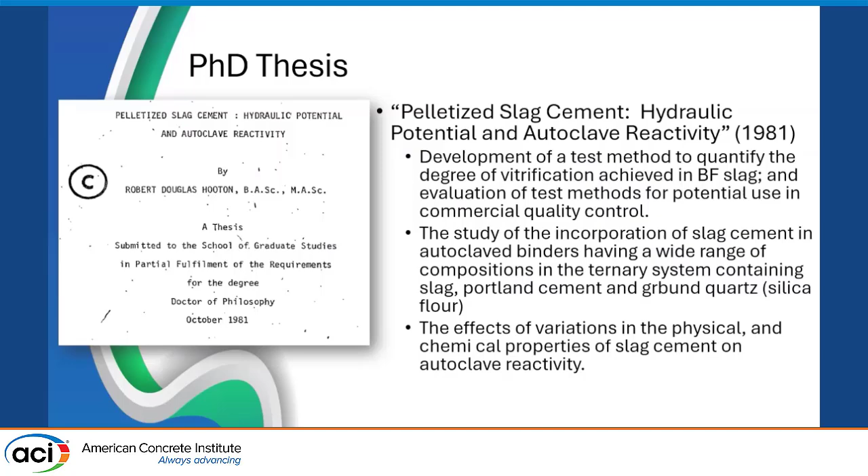The study also studied the incorporation of slag cement in autoclave binders having a wide range of compositions in the ternary system containing slag, Portland cement, and ground quartz or silica flour. And then finally, the effects of variations in the physical and chemical properties of slag cement on autoclave reactivity. So that was the 256 pages. There were several technical papers that resulted from this, of course.

The scope of Doug's research over the many years includes concrete durability and service life, various properties of Portland, SCMs, all SCMs, not just slag, admixtures, structures and bridges, and especially durability, waste material utilization, alkali aggregate reactions, sulfate resistance, de-icer salt scaling resistance, properties of ancient concrete materials. I think some of those were the original buildings built with slag in Toronto. Those are now ancient. And performance standards, specifications for concrete.

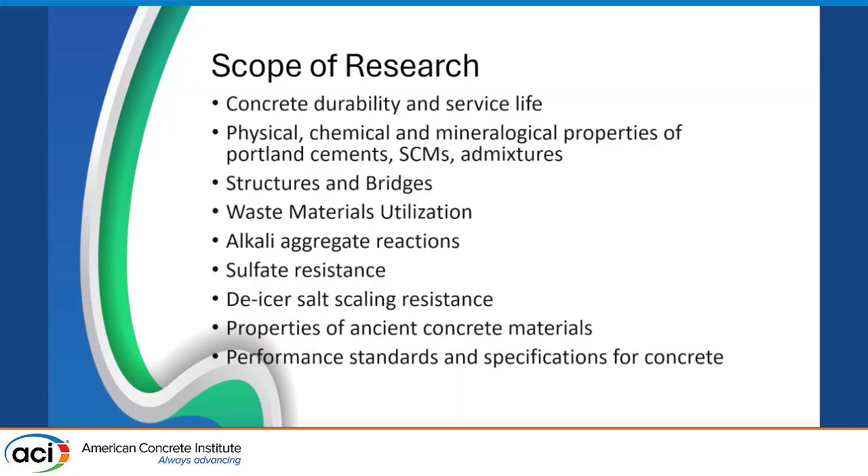He's received many honors. Some of the highlights are the Bryant Mather Award from ASTM. He's an honorary member of RILEM and ACI, and he was awarded the Research Chair in Concrete Durability and Sustainability from the Natural Sciences and Engineering Research Council of Canada and the Cement Association of Canada, just to mention very few of those awards.

Now let's get into the meat of my presentation and talk a little bit about Doug's work with slag cement. Doug has a curriculum vitae on his website, so I went through that, and I did a quick look and found out that probably around 42 out of the 226 items in his scholarly and creative works had to do with slag one way or another.

His very first cited work was glass content determination and strength development predictions for vitrified blast furnace slag. This, I believe, was probably an offshoot of his thesis. It was part of ACI SP 79 in 1983, and in this he established that XRD was the most reliable method for determination of degree of vitrification, and it also established that the strength of slag and Portland cement mortars was related to the chemical composition, fineness, and degree of vitrification.

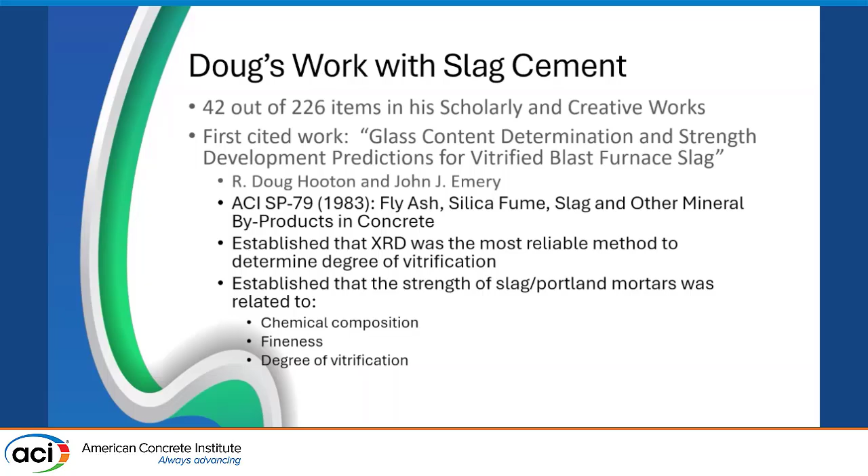So what I thought, because there's so many different works that Doug has done, I went back to, he is chair right now of ACI 233, and I was trying to look for some history. Do you know when 233 was formed as a committee? Were you on it when it was formed? 83, 84. Yeah, you probably were one of the original members on it. And if nothing else, you're a very long-standing member of the committee.

And I looked at that, and there are 16 references in that report, which is our current report for ACI 233. And what I thought I'd do is, since those were the ones that were cited, is take a quick look at each of those and see the different areas that Doug had a hand in, and there are many.

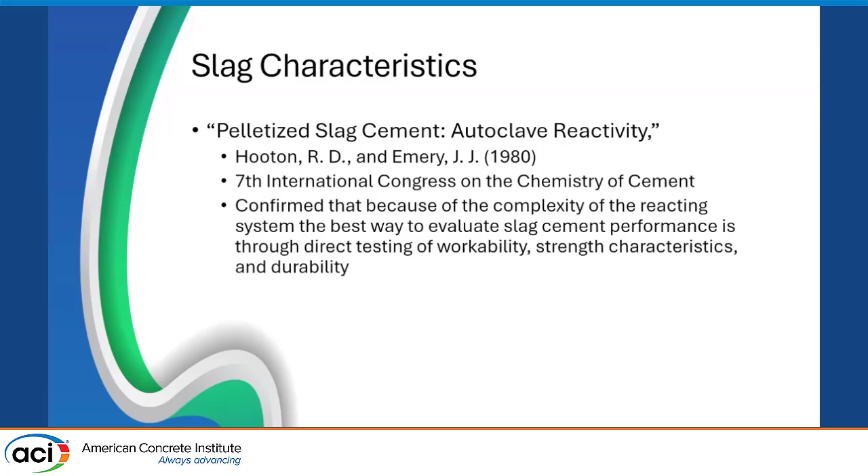For instance, on slag characteristics, there was a paper called Pelletized Slag Cement Autoclave Reactivity, and it confirmed that because of the complexity of the reacting system, the best way to evaluate slag cement is not necessarily by looking at the materials that it's composed of and whatnot, but really through direct testing of workability, strength characteristics, and durability.

Then we get into some of the durability aspects of slag cement. For instance, sulfate resistance. Doug had a paper called Sulfate Resistance of a Canadian Slag Cement. This is one of the references in ACI 233. And it was published in the ACI Materials Journal.

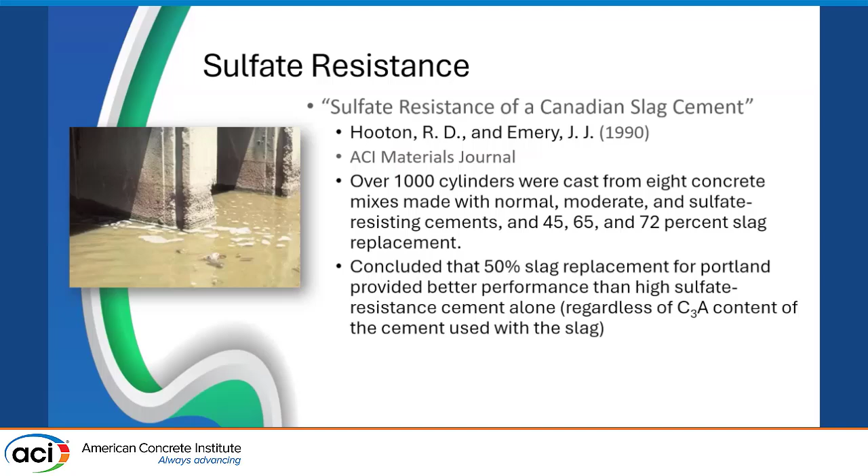Here they did over 1,000 cylinders cast from 8 concrete mixes, looked at 45, 65, and 72% slag, and basically concluded that 50% slag replacement for Portland generally can provide a better performance than a high sulfate resistant cement, regardless of C3A content. So you could use a type 1 cement with 50% slag and get better performance.

Also, Doug's done a lot of work with ternary mixtures of various types, ternary with slag and silica fume, slag and fly ash. Generally, most of them are with some type of slag in there.

His paper, Some Characteristics of High-Strength Structural Concrete, summarized one of these ancient concrete structures, the 68-story Scotia Plaza building, and it had a ternary mixture with 28% slag, 7.5% silica fume, and there was some concern that there was some strength retrogression in silica fume concrete, so he did some testing over 7 years to ensure that was not happening.

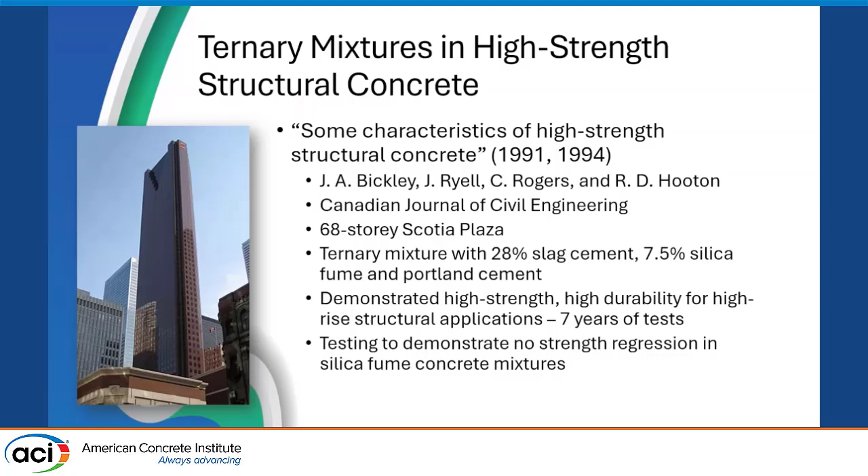Another paper was Canadian Use of Ground Granulated Blast Furnace Slag as an SCM for Enhanced Performance of Concrete. This particular paper kind of summarized a lot of the benefits of slag cement, strength enhancement, workability, durability enhancements, and also noted that slag had become, at that point in time, which was 2000, the predominant SCM in Ontario.

Another paper is Durability of Ternary Blend Concrete with Silica Fume and Blast Furnace Slag. This was a series of laboratory and outdoor exposure site studies which showed how ternary mixtures with slag cement and silica fume significantly improved rapid chloride permeability and ASR resistance. And this used large-scale cast-in-place slabs and simultaneous lab specimens, and actually looked at salt scaling too. And we'll get into salt scaling a little more. Doug's done quite a bit of work on salt scaling.

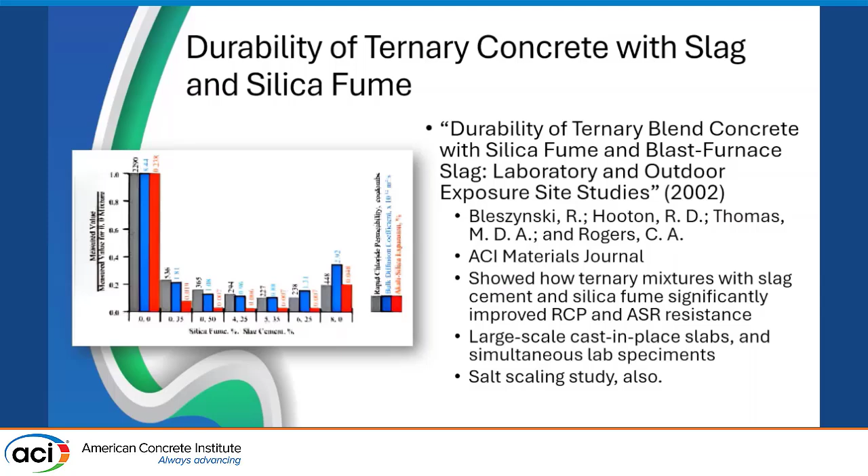Even delayed ettringite formation, there was a paper called The Effect of Pozzolans and Slag on the Expansion of Mortars Cured at Elevated Temperatures, microstructural and microchemical investigations. And basically what Doug showed here was for slag, metakaolin, and fly ash, using the right materials and the right amounts, you could generally prevent DEF from occurring in heat-cured mortars.

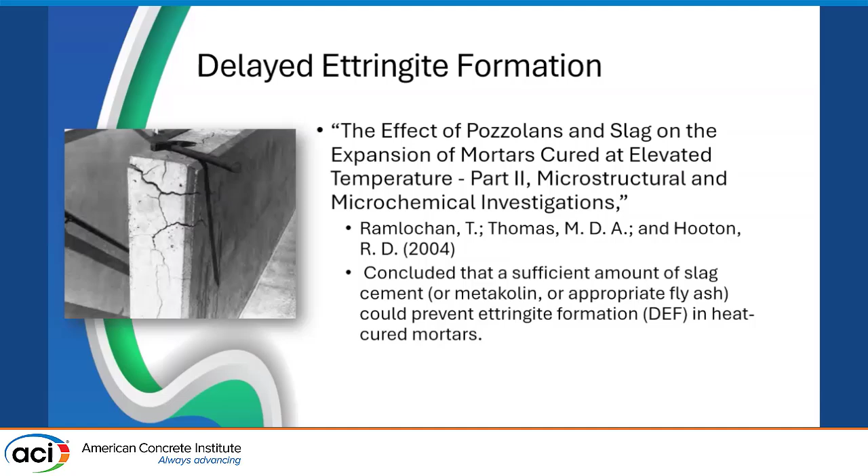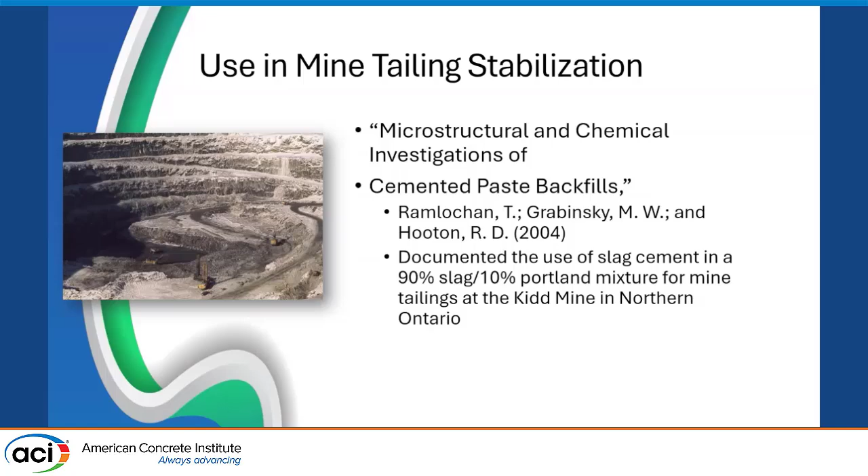Even outside the box of concrete, he had a paper called Microstructural and Chemical Investigations of Cemented Paste Backfills, and this looked at a particular mine, the Kidd Mine in northern Ontario, where they used 90% slag, 10% Portland to stabilize the mine tailings.

Then here we get into a couple of papers on de-icer salt scaling resistance. There's sometimes been a knock on slag or even fly ash on de-icer salt scaling, being on the commercial side of going into new markets, and they don't finish it correctly. They trowel in the bleed water, and then you get salt scaling.

And what this actually showed is in a controlled environment, it reported on 12 years of field performance on 6 slag and fly ash SCM mixtures, between 25 and 50% slag, 15% fly ash, and a ternary mixture. And it looked at cured and tested specimens with ASTM C672 and found that this was a very, very severe test compared to when you allow the slag to cure out for about 4 months and then put it through the testing regimen.

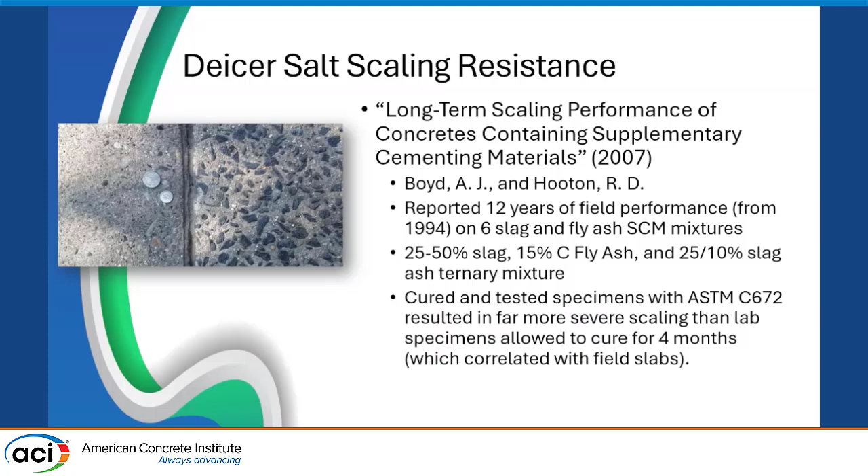The test was probably designed for normal Portland cement with much quicker cure and strength gain times.

And a follow-on study, De-icing Salt Scaling Resistance Incorporating SCMs: Laboratory and Field Test Data, in 2008, basically showed that there was a relatively new test at the time called the BNQ test, which is a salt scaling test developed in Quebec. That is not the ASTM C672 test, and that particular study found that the BNQ test did a much better job in comparisons with the field studies as opposed to ASTM C672, which was a very, very harsh test.

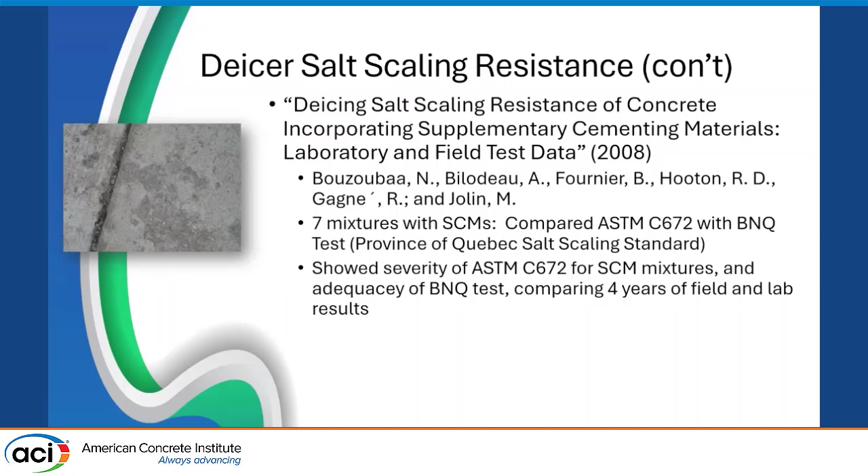On drying shrinkage, this is one of my favorite papers that he ever wrote because I helped him a little bit on it. I'm just kidding.

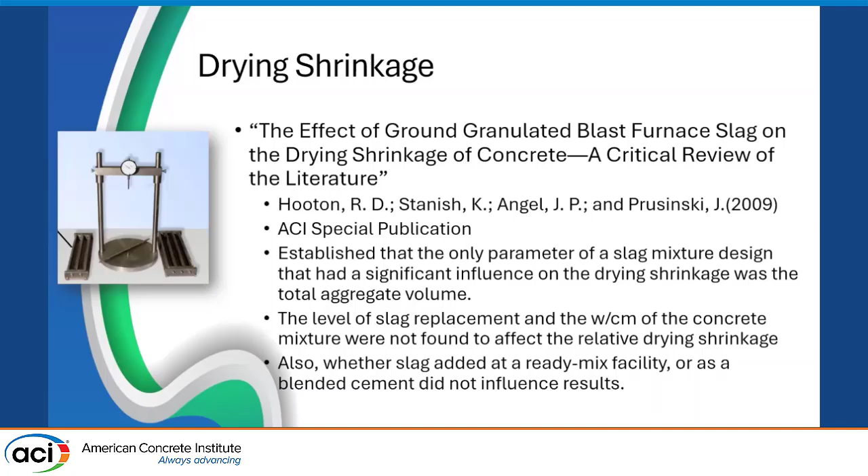The Effect of Ground Granulated Blast Furnace Slag on Drying Shrinkage of Concrete: A Critical Review. There were some concerns that slag had higher shrinkage than regular Portland cement mixtures. The Slag Cement Association at the time, and I was part of it then, asked Doug to do a study on this, and he established that really the only parameter of a slag mixture design that had a significant influence on the drying shrinkage was the total aggregate volume. The slag itself, whether it's in a blended cement or added at the ready mix plant, didn't have an effect on drying shrinkage.

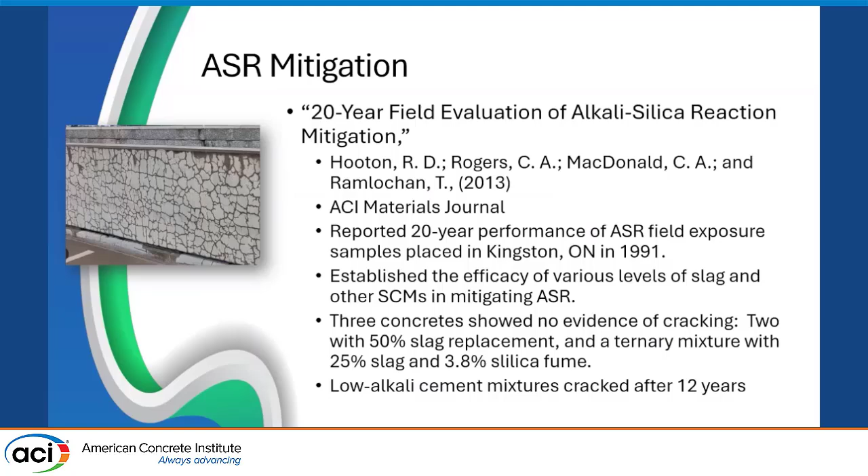ASR mitigation, another very large and important area of research. This particular study is kind of a culmination, a 20-year field evaluation of ASR mitigation. This was in the ACI Materials Journal, reporting 20-year performance of ASR field exposure samples placed in 1991. Among the many results and conclusions of the study, he found that there were actually 3 concretes that showed no evidence whatsoever of cracking with a deleterious aggregate: 2 were with 50% slag replacement, and a ternary mixture with 25% slag and 3.8% silica fume.

I'm just about at the end. All of these papers are part of ACI 233, and they're representative of the vast amount of research that Doug has performed over the years.

With the Slag Cement Association, when I was there, we brought Doug in and asked him to help us get the word out on slag, because it was a bit more mature in Canada, but in the United States, other than maybe in the Baltimore, Washington, Mid-Atlantic area, it was still a pretty new material. So we had Doug do a series of seminars with concrete decision makers, engineers, producers, and he helped get the word out. This was really critical to establishing a baseline of education on slag in the areas that slag was available. So that was extremely helpful, besides just being able to talk to Doug about various aspects of slag, which our Slag Cement Association Technical Committee did from time to time.

The other thing we did is initiate some research with Doug. I already mentioned the shrinkage study, but there were some other de-icer salt scaling studies beyond the ones I've mentioned already. The Slag Cement Association pushed these through the Iowa State CP Tech Center, and Doug and Scott Schlorholtz went out and looked at 26 different sites which had different levels of slag, and they did an analysis of how those sites performed, and actually they did quite well. The conclusion was that if slag is placed properly, it's not going to scale generally.